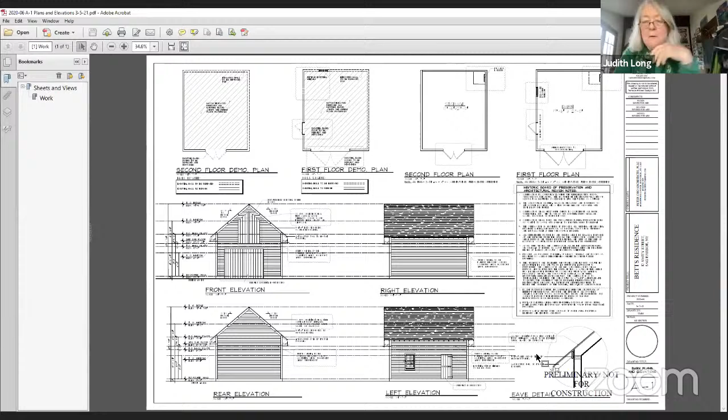No, you're not wrong at all, Judith. And when we were there, as the applicant has said, we were able to see traces of old red paint on the side of the building that retains a portion of its original siding. And I think I understood him to say at the beginning of this that it was going to be painted red.

I'm also a little mystified. Well, I'll clarify - our intent was to paint it red. After discussion with the neighbor, they objected to that. So I'm trying to thread the needle here and navigate this process. And so while we like the idea of painting the barn, we're trying to move this project ahead.

And so I don't disagree with you. I mean, I have a property in Connecticut. I have a red barn, I have a yellow barn, and I have an unpainted barn on the property. And I understand that historically barns are red, but I'm also trying to navigate this process.

Okay, we're not generalizing, we're not saying barns were red or barns were not. What we're saying is that there's evidence there that we have seen for the fact that this particular barn, if you will, carriage house, whatever you want to call it, was painted red, and that's a very early color. It doesn't look like it's a coat of paint on top of an earlier coat.

Right. If your neighbor is here, it would probably be good to hear whatever the objection is. This is the forum for the discussion. Steve, do you have comments?

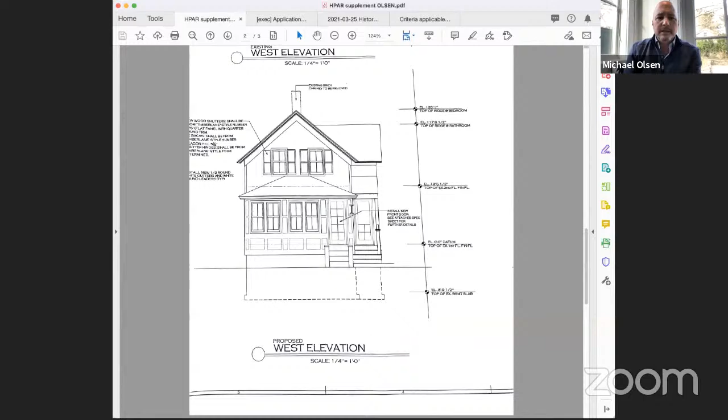And the proposal submitted in December was to replace it with a door like that. There was some discussion about whether it'd be more appropriate to do a 10-light that matched, so I supplemented the application. This was the original plans approved by the building inspector proposing installing a new front door, and I proposed to do that with a 10-light that matches, which will repair the door currently there.

Bethany, comments? I think that's great. Steve? Perfect. It's fine. Bob? I think that's fine. Judith? Yes, it's fine. Val? Yep, we're good.

Okay, great, moving right along. 128 Jermain, please. Good evening, members of the board. Brian DeSesa, 2462 Main Street, Suite 7, Bridgehampton, New York, attorney for the applicant.

If I could screen share please, Carrie. Mr. Chairman, you can go ahead. Thank you, Brian. This is the first time I'm appearing before you on this project. We have made some revisions since the board last saw this, and clarifications, so I'd like to walk the board through that. First, everyone can see this screen, the survey?

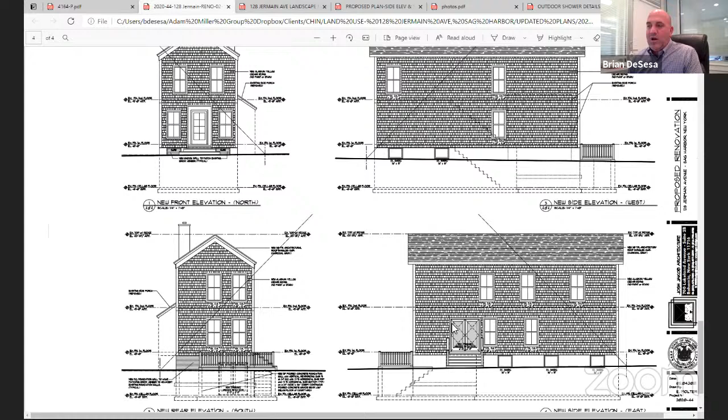Good. I'd like to take you to the elevations so we can be clearer on these. The proposal, and we can zoom in, is to re-side the existing house, change the roofing. We've spec'd those on the materials submitted, and to introduce a French door on the eastern elevation with a set of stairs. I could zoom in on that.

Okay, you're so gonna get - there you go. Yep, so this is the proposed new door, a hinged patio door with a set of stairs to leave that internal area and stairs down to existing grade. This also shows where grade would be and where these stairs would go down to enter that basement area.

If I could just point out a couple things that I need clarified. Yes. EXDH - existing double hung, I'm assuming? Yes, that is correct. And then at the grade level where the existing awning windows are, you're gonna clad that with brick? That is correct. Does that say that somewhere?

I can have that added. I thought that was on there. Just to make a note, Mr. Chairman, you're supposed to match the other two sides. I don't think that's possible because the new foundation that's been poured comes out to a full dimension of the basement.

Any application of material other than paint would bring it forward of the siding. Now, Brian, in a previous meeting there was some sort of approval to fix this basement that had been removed because of a dangerous situation. That's correct, and the detail did have the concrete and then incorporating that brick skirt. And it's going to be faced in brick. That's my understanding, that has not changed.

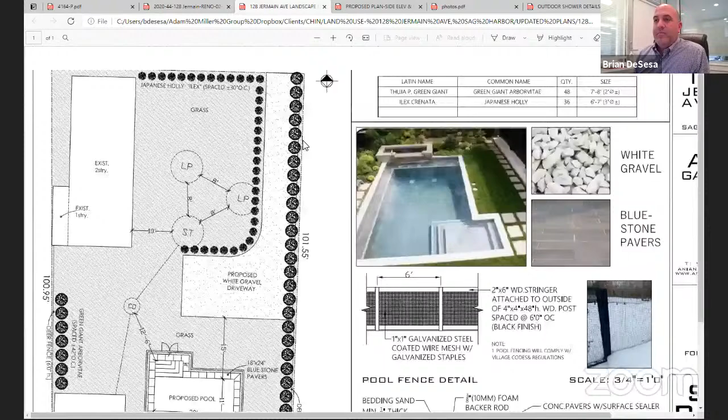We then also had an addition to the landscaping. We cleaned up the landscape plan. There wasn't one there previously, so we gave a planting chart, a materials chart, a fence detail, and indicated spacing on center. As the board may recall, the pool that is currently proposed was approved under a 2013 ARB decision in the same location and orientation, but wasn't provided with as much detail, so we provided the coping details and additional materials this board now requests, which was different from 2013.

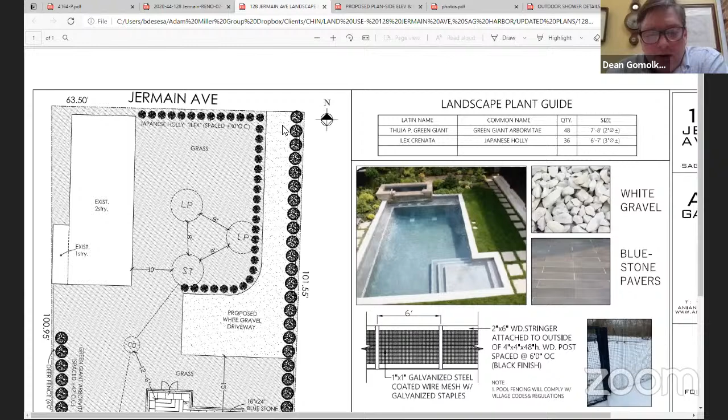So to call out the details, can you explain how you complete the circuit with the pool fencing, and the exact vertical dimension of this final fence? I can have that called out on the survey. It's not on there, I can have that called out. Because if you look from Jermain, I don't see how this pool fence closes, and we would have full view of a 6-foot 1x1 fence from the street. Okay, we can do that. Okay, please continue.

And then going back to the roofing, it's now called out as charcoal gray, which is what the applicant is proposing. And the siding is to be Alaskan yellow cedar, to weather naturally. Those were the open points from reviewing the last meetings based on my review.

Judith, do you have comments on this application? I would like to know about adding the doors on the side. Is it all right to simply punch a big hole in the side of a historic house and add big doors? Also, these doors look to be oddly very close to a window. Zach, can you opine on these doors and also the siding? Yeah, well, there are two points there.

I guess the siding was brought up first, and my observation is that the original shiplap siding exists beneath the present asbestos shingle applied on top. So I wouldn't advise that wood shingle be used. This was built as a commercial store, not a house. I think the use of wood shingle sort of charms it up, tries to transform it into something it's not. So just as we had a siding discussion a few minutes ago with another building across town, we have a comparable situation here, except all the original siding appears to survive beneath the newer layer, and it may have been damaged in the process, but we're not going to know that until it's taken off. That's my recommendation on the siding.

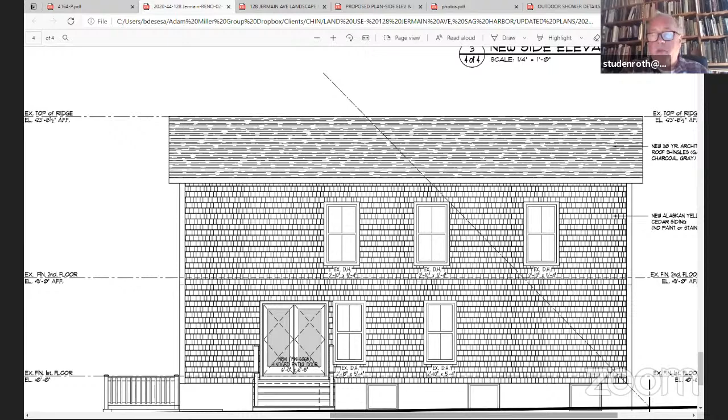I think Judith's point is quite right. You do allow the introduction of a door or a different window from time to time to accommodate a new usage of the space. But the way that pair of doors is placed is uncomfortably close to the window, which looks like it's actually been nudged about 8 inches to the side to make it work. A single door, for example, would work just as well to enable the applicant to get in and out without making such a bold statement. Perhaps a door divided into 4 lights, as opposed to a pair of single light doors, would aesthetically blend better on that wall. It's quite visible from the street, not like the back wall where you could take more liberties. So I think a single door leading to a flight of steps down wouldn't be a major change to that wall.

Do you have comments? Al Florio: yeah, I was going to say if they could put lights in the door, I think it would make it consistent to the house, maybe harmonize a little bit better. That's a good point.

So what if I propose this to the board: if the board would grant permission to remove the existing siding so we could see the condition of the underneath siding, because the proposition is that it's in good condition. Let's remove it to see, and follow up in 2 weeks. I wasn't making an observation about condition because we can't see the condition. My comment was to remove the existing so we could see the condition, because we don't know if it's good or bad until we remove it. But the decision about the type of siding is not contingent upon the condition of what is there. It's about observation — whether the condition of the original siding beneath the later layers is deemed such that it cannot be preserved, that type is still the presenting fact, not 'oh well, then we can choose whatever siding we want.' That's the point of the forensic investigation, is to determine what is appropriate.

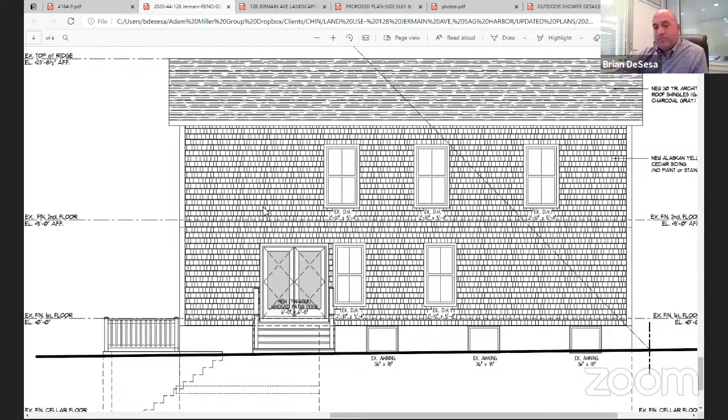So, Bethany, do you have any other comments? No, just that it was voted on and approved, that's all. Yeah, but they're here now to present. I understand, whatever the deal is — Miss Bethany, that's not fair. Excuse me, I'm just saying, I just want to put it on the record that last meeting she did come to us with the extending of the ARB approval for the siding and the pool. It was yellow, correct, so I just want you guys to be aware of that. That's what I remember.

But I do know that we're here for new requests, so that's why I bring that up in this format.

Could I bring up the missing chimney? I don't see a chimney in this drawing. I know that the existing chimney, the original one, was demolished. I don't know that, because there's still a patch in the roof showing where it was. It was on the other slope of the roof, slightly off the ridge. That's now been demolished; it's on the other side. Correct, it was there. Oh, there it is.

That's representing where the applicant would like to put it. It should show up on both walls because it rises considerably above the ridge. It doesn't show up on the side elevation, and that's not where the original one was. Just pointing out that that's something that was removed without this board's approval.

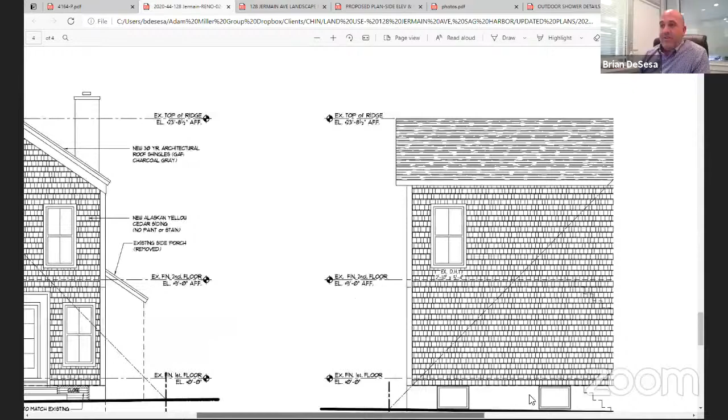Brian, can you have that chimney detailed so we know what materials are used? Yep, I can have it added to the sides.

Zach, from a historical perspective, the one that replaces it should be in the same spot. Does it matter where it was? The way it's presented, it's kind of transforming this old store into a house. It's bringing the chimney over to the outside side wall so a chimney piece can presumably be stuck against the side wall inside. That's not your issue if you're not living in the house, but it transforms the appearance of the building in a way that was not discussed.

And that was just one of the architectural features. It's a very simple house, but there are a couple of distinctive features. One being that very prominent centered front door, which tells you it's not a house, it's a store. And that chimney, which was closer to the ridge and way in the back, because that's where people presumably lived upstairs above the store. Now we've lost the chimney. I'm just pointing that out as something that's been overlooked in the discussion, and it's one more element that's been removed without discussion.

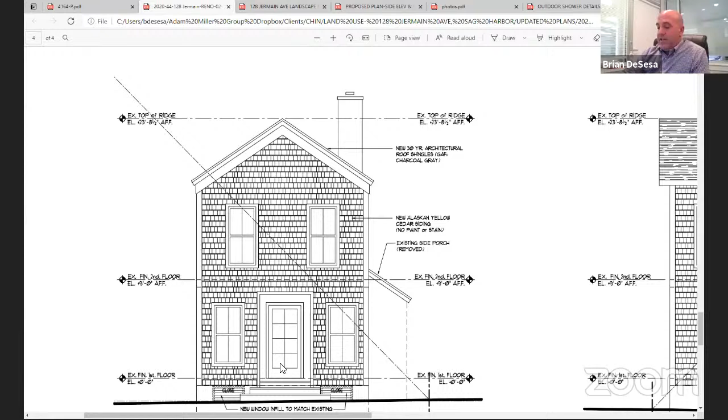Okay, Brian, that's important, right? Yep, we'll get that detail added. Not a problem. Okay, Steve Williams, comments?

No, I think a lot has been said. I just, in these elevations, things don't seem to be proportional. If you look at the two windows over the center door entrance, one kind of overhangs the molding, one doesn't—the one on the left doesn't seem to. Can we get some dimensions, representations of some plans?

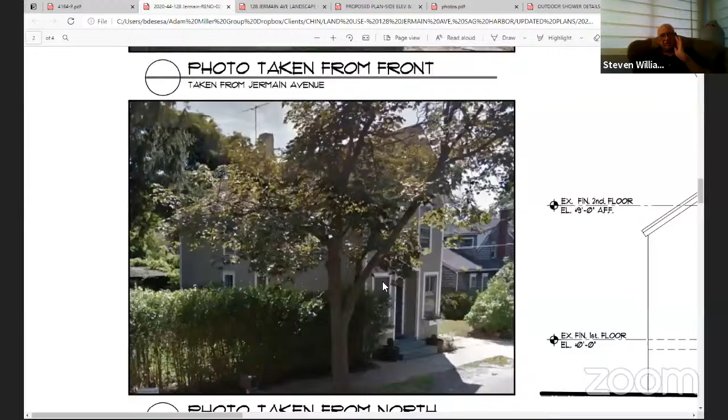Mr. Williams, if you look, I have some photos here that actually show that's the existing condition on the property. Just to let you know, it's not centered on the actual existing house. So do you have photos of the side? Because I noticed it also on the side elevations, or the drawings of the elevations. All existing windows are remaining. That's correct, they have them here. I'll get a picture that doesn't have the trees on it for you for the next one, but yes.

And can you superimpose the requested side entry door? I can ask for that. Okay, thank you. Bob Adams? I think everything's really been covered.

I'll make that motion to table 128 Jermain Avenue. Is there a second? Second. That's Steve Williams. All in favor? Aye. Opposed? Great, thank you very much, Brian. And that date is the 8th, April 8th. Thank you.

New business, and that is 8 Dartmouth Road, please. Good evening, members of the board. Brian DeSesa, attorney for the applicant of 8 Dartmouth Road, 2462 Main Street, Suite 7, Bridgehampton, New York. If I may share, Mr. Chairman. Go ahead.

So this is an application for property located at 8 Dartmouth. This project, as some of you may have read, there was an issue with the builder the applicant had hired, who subsequently fraudulently obtained building and ARB approvals and is now being prosecuted by the district attorney's office. The homeowner and applicant was unaware that both approvals presented to him were not in fact issued by the village. So we're in a situation where there is a partial as-built. Work was stopped, and we're now restarting the process, coming to the architectural review board first.

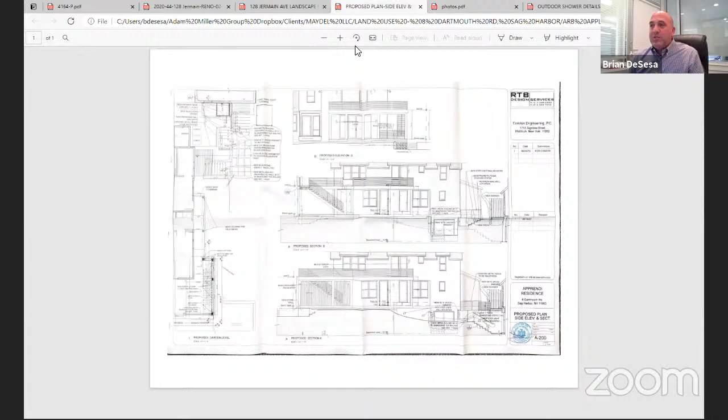What the applicant is proposing is, on the northern elevation I just showed you, introducing a door on their second floor in the hallway. There are bedrooms to this side of the house, and a master on the other side.

Brian, I remember that this site is heavily screened. It is, so I have some photos to present. This was the area that was added under the guise of a permit, before a stop work order was issued. This is the view looking north toward the neighbor of that area.

This is the area looking the reverse way. These are the renderings of what was being proposed: a catwalk across, with a walkway to connect to the main deck on the eastern side of the property, with a staircase and railing down.

What the applicant was proposing: there's an existing deck here, as you can see in this presentation, and they're proposing to make this addition across there. In addition, also done at the same time we're looking for permission for, an outdoor shower was constructed.

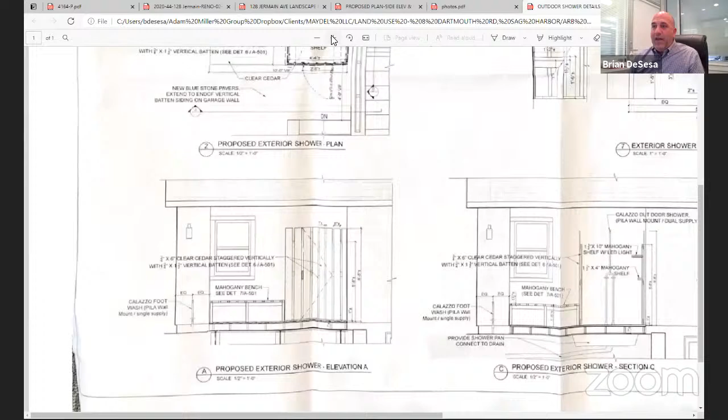We're looking for a restart on both of these matters, where the applicant was presented with the idea that approvals had been obtained, which hadn't been. This is actually finished. The decking catwalk area was under construction when that was ascertained.

Brian, will these structures require variances? The catwalk will require a variance, but we wanted to get this board's input first before we proceed in that way from an aesthetic standpoint.

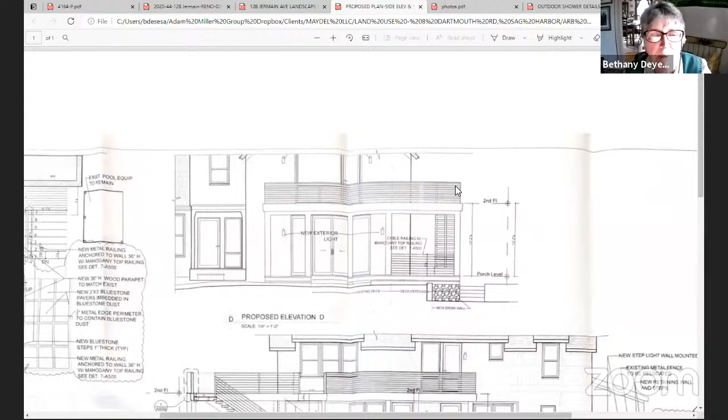So how far does the deck go back? Let's see the picture, Brian. How far... does the new deck, are they going to build out from the bottom? No, it's just on the second floor. And the area from the corner of the existing house to where the new door is...

It's 3 feet 6 inches wide. It gets wider here, but the area adjacent to the house would be the area that a variance would need to be obtained for. The rest of it would conform to what's existing.

I would note, this is the first floor of that area, where you see the existing decking, which would remain, and the applicant is proposing to add this above it. So you have that existing.

So does it wrap around all the way? It wraps from here to this deck area, which is existing and was permitted. And this deck area then looks toward the pool and the 3 roads that surround the house. So this is that deck.

Steve Williams, comments?

Steve, can the public offer comment now, or should I tell you when? Tell me when. I just want to run through my board first, please.

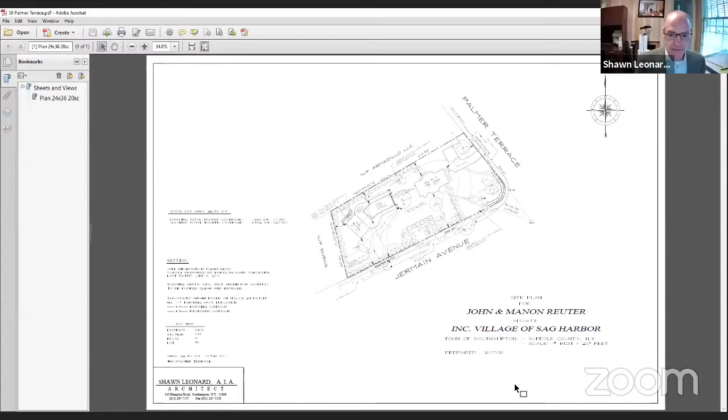I had been before this board a couple of years ago for this property, for which there was going to be an addition put onto the house. We did have a pool, and none of that is going forward. As you can see from the new proposed site plan, the existing house is staying as is, and the existing curb cut off of Jermain would remain.

What we're proposing is a new pool design placed right off of the accessory building on the property, with a bluestone patio going around it. Because of the grade change from the house to the accessory building, we have a proposed retaining wall, which would be 2 feet high on the house side of the pool.

We have it all screened off. What we originally had was arborvitaes running around the property, and the fence would be a pool-compliant metal fence inside the tree hedge, 4 feet high and black in color.

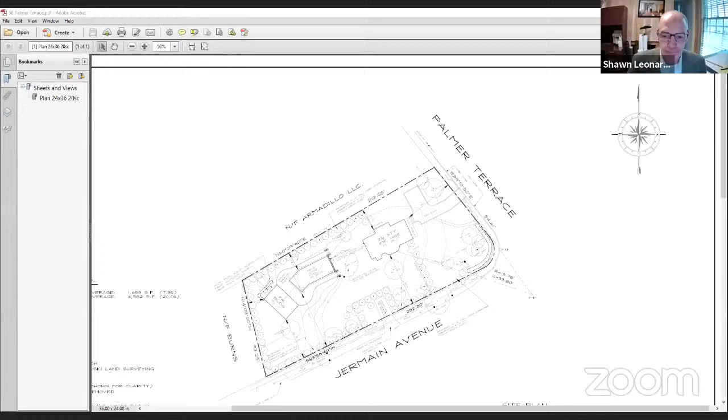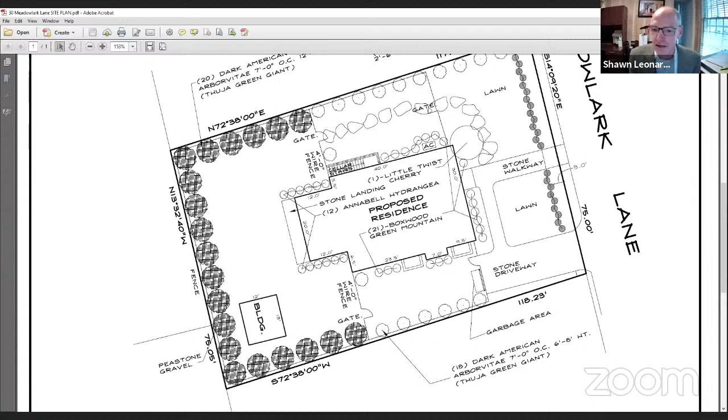We did present the drawing of the gate and fence we're proposing on either side of the house, which is in your packet. It'll just be a white picket fence, 4 feet high on both sides, and then there's the garbage enclosure.

Any questions? Back to that site plan, Carrie? And then the driveway, it's just a picky thing, but you're supposed to maintain that 5-foot setback from the property line. 5 feet there. You're maintaining the 5 feet? Yes, we'll make sure I maintain the 5 feet. Great, I'll note that.

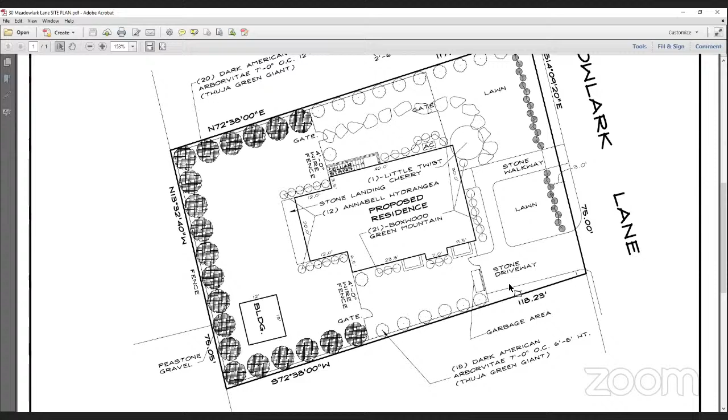Okay, Bethany, comments? I'm fine with this plan. Judith? Totally fine. Steve? I'm fine with it. Val? Yep, we're good. Bob? I'm good with it. Do I have a motion to approve 30 Meadowlark? I'll make that motion. Who's the second on that? Steve? Yeah, I'm second. That's Judith and Steve. All in favor? Aye. Opposed? Thank you very much.

Sag Harbor Yacht Club, please. Anybody here for Sag Harbor Yacht Club? Okay, possibly we'll second call that. Patrick Malloy, 1A Bay Street. Patrick Malloy, I believe it's 84 High Street. Dean, I believe it's a sign.

Can we move on the Malloy sign? So we'll hold off on the canopy, which is the Sag Harbor Yacht Club. Carrie, are they just replacing the existing awning? No, I believe they're adding and making the canopy, like the picnic area, bigger, but I'm not 100% sure. Dennis Downs is representing that. Yeah, it was hard reading the plan. Okay, so we need representation on that one. So to Mrs. Dearman's point, can we take a look at the Malloy property?

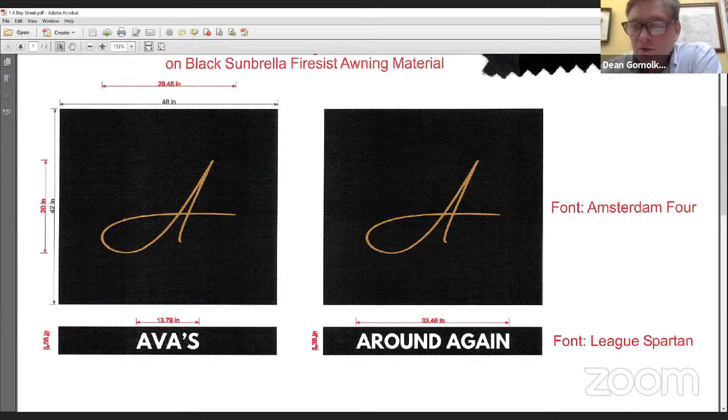Okay, Val, comments? No. Judith? I think they look quite nice. Steve? I think it's fine. Bethany? I actually would like to make the motion, I'll move for the Malloy 1A Bay Street signs. Is there a second? I'll second. Bethany and Val, all in favor? Aye. Opposed? Thank you both so much.

84 High Street. That's me, Carrie. Okay, who's me?

David Burridge. Look who's here. Oh, hey David, how are you all doing? You're still all having fun. Nice to see you. I'm still in the same place. Okay, so are you going to show it, Carrie, or do you want me to share the screen? I can do it if you'd like. Yeah, I can blow it up if you want. Your choice, I mean, ask questions.

All right, go ahead. Survey.

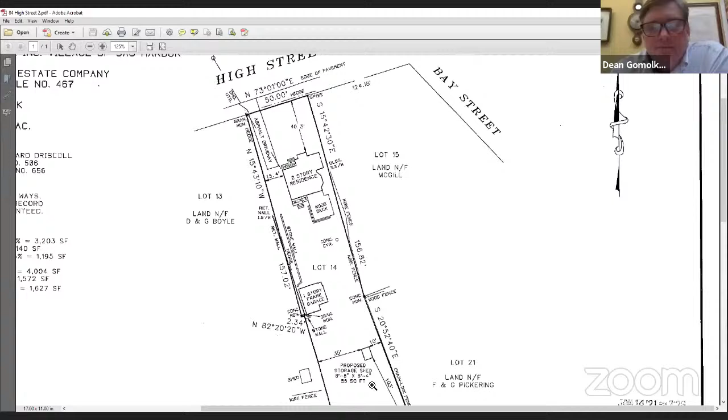Just show us your details. Yeah, on the second sheet, Carrie. Do you want me to show it? I got it. Oh yeah, got it. Oh yeah, I remember.

So David, walk us through this design. Okay, as I said, in the wooded half lot that goes through to Prospect Street, there's just a little 9-foot by 6-foot shed in the woods, and we've got a fence between the shed and the Pickerings' property next to us, so they don't have to look at the shed. We've also got another fence on the other side — if you look at drawing number 9, it's between our existing outbuilding and the neighbor's pool we want to screen.

Great presentation, David, thank you very much. You don't know how much I mean that. Yeah, Judith, comments? I think it looks lovely.

I'm curious, is it all right to put a shed on a separate lot? No, it is all one lot — when they divided Sag Harbor it was all these different lots, but it's been the same lot for the last 70 years. Oh, so it's actually just one giant piece of property that goes all the way through. So anyway, I think it looks great.

Thank you, nice to see you, David. Yeah, good to see you all. Keep up the good work.

I'd like to make a motion, Mr. Chairman, that we accept the proposal as presented at 84 High. Okay, anybody second? I second that. Second. All in favor? Aye. Opposed? Great, thank you.

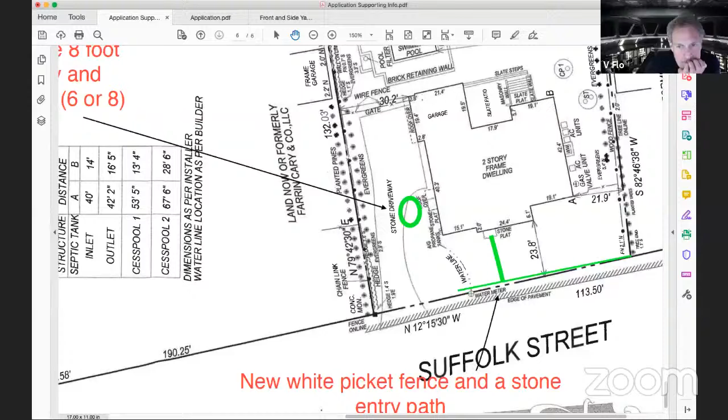So you said you don't require me at the next meeting, just these details? Yes, please. Okay, understood. I make a motion to close and table 43 Suffolk Street. Do I have a second? Second. All in favor? Aye. Opposed? So that was me and Val.

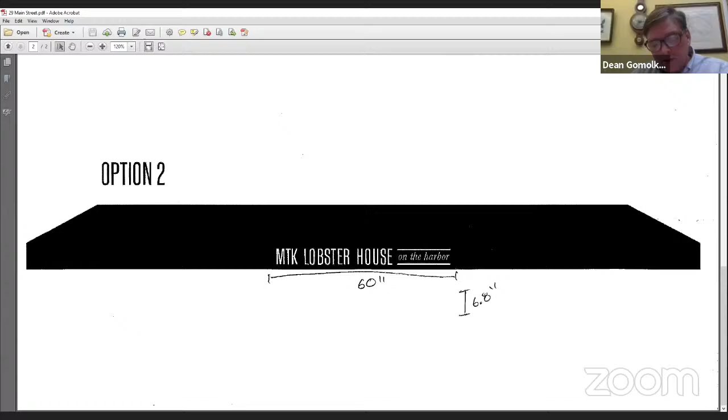Hi there, everyone. It's David Filer from Whalen Filer, PLLC, 532 Montauk Highway, Amagansett, and I represent the owners of 29 Prospect Avenue, Dan Weiss and Amy Burkauer. How are you all tonight? Great, you? Good, thank you. Nice to see you. So we're before the board applying for a certificate of appropriateness for installation of a generator behind 29 Prospect Avenue.

I'm glad to share my screen, or Carrie, if you want to pull it up. I just thought we'd look at a couple of photos and the survey to show you all where the proposed generator would go. You can share your screen. Okay, thanks, Carrie. Let's see if this works.

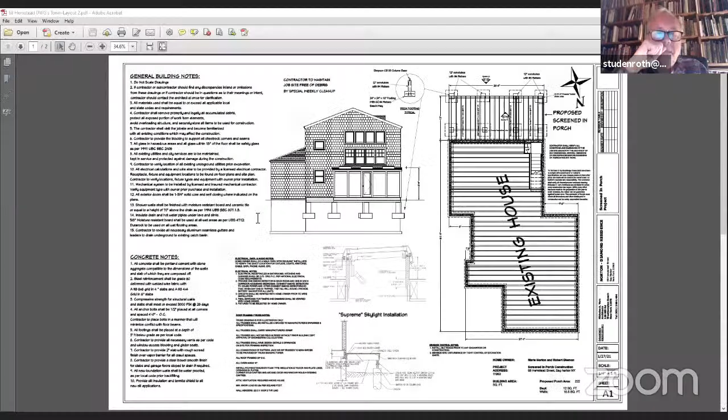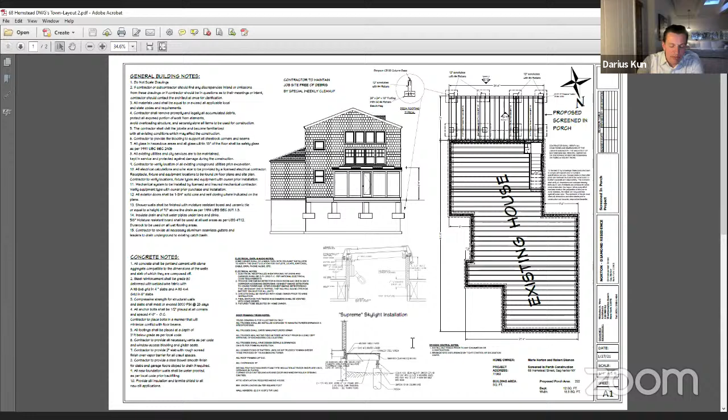And the survey, if you could find it please. Darius, this is all that we were sent, is this and this. Okay, I have a survey with me, I'll try to start it up on my screen, maybe later, but you can email it to me and I can pull it up that way, but this is all we were sent in the PDF. Okay, so can you leave the 3D photo here? Actually, do you have a JPEG that I sent you of the property? I emailed it to you. It's in your email, I believe this is what we got, but I will look.

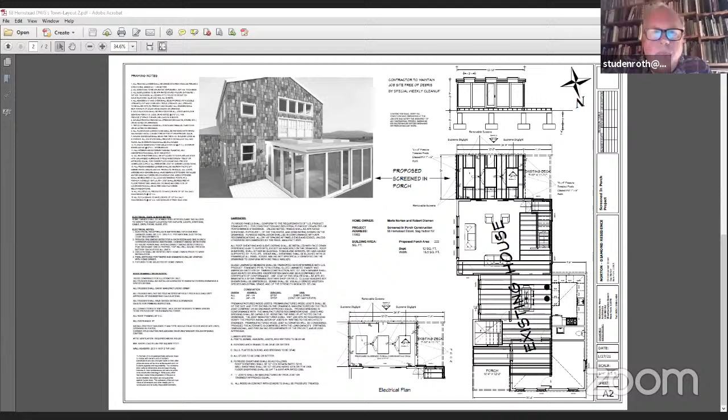Do you have any comments on this property? I'm sorry? Zach? Oh, I'm sorry. Well, I'm a little perplexed because this is listed in the nomination as a contributing building from the 1850s, and from the angle we're looking at it, I'm not getting that, so I'm not... okay, sure.

So can everybody see the survey? We can, yes. Okay, so if you look to the back of the house, you see Hempstead Street up front. And if you look at the back, it shows a proposed porch over existing deck. So there is an existing deck, which is 12 by 26. And we would like to build a screened-in porch on top of the existing deck, which is much smaller, only 12 foot by 18 and a half.

And the purpose why the homeowners want it is to protect them from summer heat and mosquitoes, because as you know, there is a Sag Harbor Bay right across Hempstead Street, and in summer, if the wind is a certain direction, mosquitoes just fly in over, and it's impossible to be there in the back.

You want to take a look at this property? Sure, Zach? Yeah, it'd be interesting because the question might arise how much of this is going to be visible from Hempstead Street, since it's a contributing building. Actually, from Hempstead Street, you probably will not be able to see it at all. Well, that's what a site visit would determine. Oh yes, sure, of course.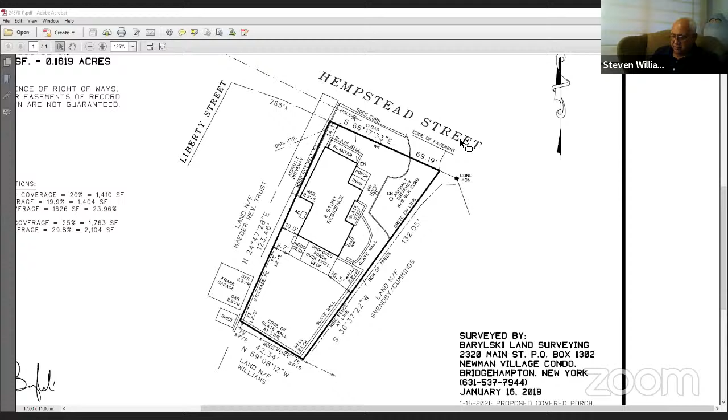227 Main Street is on the phone, I believe. Oh geez, and he couldn't hear, but he just asked me for the Zoom link again. So maybe we'll just go on to the next one, and if he shows... we have to go on to the next one. Okay, 69 Redwood, please.

69 Redwood. Oh, okay, we'll second that. 38 Meadowlark, please.

38 Meadowlark. Yes, hi, Mr. Chairman, this is Jim Grimes and my assistant Niamh Hegarty, and we have a proposal for you guys.

Unfortunately, we did a retaining wall on this property without understanding it required a certificate of appropriateness. It's something I don't like to do, it's an after-the-fact situation, and that's what we're before you for tonight.

We have photos and drawings and can walk you through it. If Carrie, if you can put it... those, I'm getting it. Thank you. Oh, thank you. So here's the... okay.

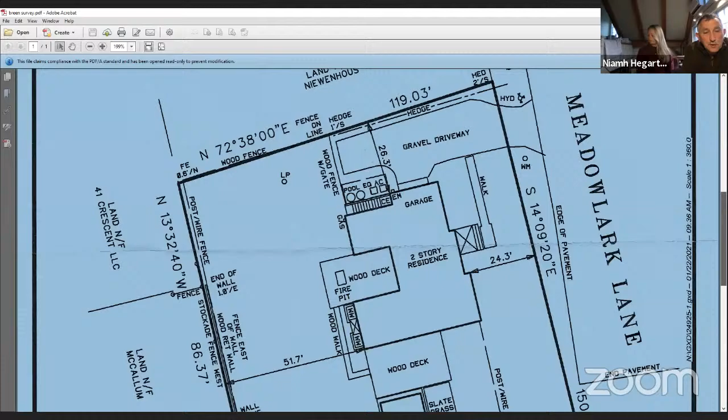Mr. Chairman, this is the survey, and this is as-built. This survey was updated in January. It shows that dimensionally the timber crib walls are well within the property line. The maximum overall height on this wall is 3 feet at its highest, which is just about where you see the stockade fence, above the 87.93, where it reaches its maximum height. As you can see in the survey, it abuts an existing stockade fence, which is the neighbor's.

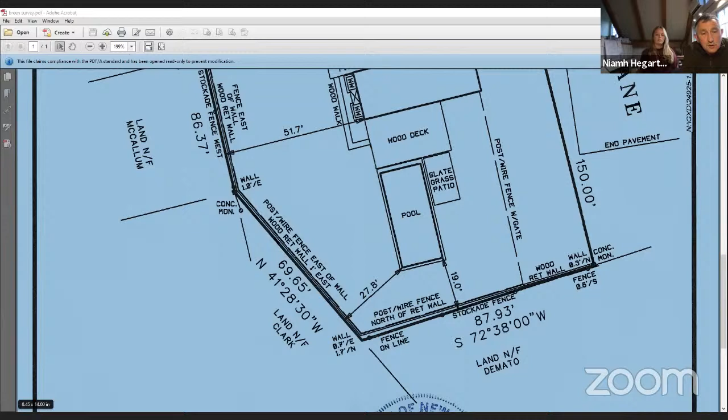So it's not visible from that neighbor's side. Where the stockade fence continues around, there's another neighbor with another stockade fence, and there's about a 20 or 30 foot section where it's really only about 2 to 2.5 feet in height that is visible from what's described as the Clark property, which doesn't show in this survey, but that's almost like a dog leg or a right of way—just a very narrow strip of land that abuts my client. Take a moment.

Elizabeth, what's the code on the wall and the property line, please? The walls have to be 3 feet back, I believe. 3 feet off the property line. Right, I believe so, that's my understanding, for retaining walls. Yep. So okay, Mr. Grimes, let's just continue with the rest of this, and then we're gonna have to figure out how to, where we go from here. All right.

Well, the proposal was to basically install Western arborvitae, identical to what's found on the property in other areas. You can see the unhighlighted existing arborvitaes on the property. It was just basically screening the backyard, adding a couple of crepe myrtles along that back line.

And what there is, Mr. Chairman, if you look up to the north, there is an existing Norway maple, which is really kind of a health and safety hazard. It's a typical Norway maple in the village there, probably never actually planted. It's multi-leadered, it's got an included bark situation. There are already some stress cracks appearing there that we were proposing removing and replacing with a 6-inch Eastern red maple.

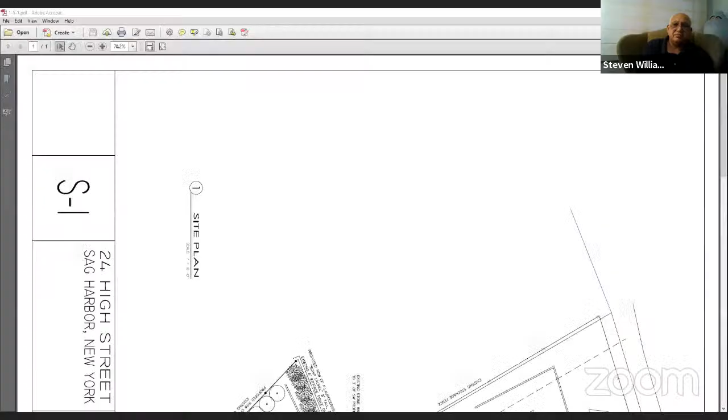You can see, Carrie, if you could bring up the site plan S1. Okay, so you can see it's a sort of L-shaped property. The main house is there up pretty close to High Street in the big black box. We're proposing a small pergola off of that house, we'll get to the detail on that in a moment. But then in the corner of the L is where we're proposing the swimming pool and pool house, and it's basically at that angle to fit in with the various setbacks for those structures.

The pool house itself, on P1, is basically just a scaled-down version of the main house, with trim details and materials to match the main house. The swimming pool is 29 by 14 with an 8 by 8 spa, bluestone coping and patio. So there's the pool house, and the pool and the details for that.

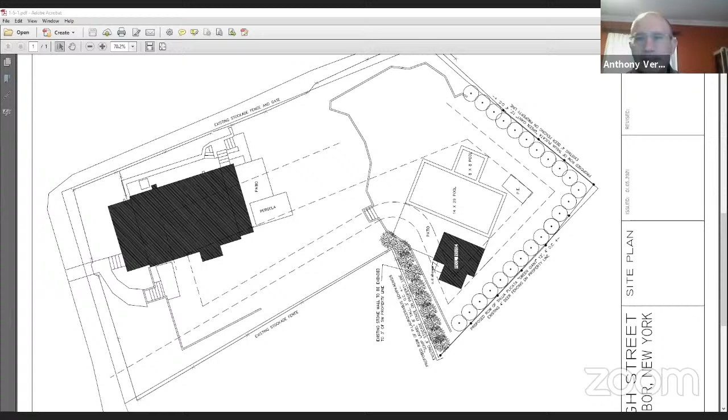Can we see the pergola? And Anthony, are there pictures of the existing house? Yes, I do have, there should be some photos in the file, one showing the rear elevation, a view of the whole rear yard, and a close-up of the rear elevation of the house. Do you see that? Can we see the next one, if possible?

Great, and then if we can go back to the elevation of the pool house, so I can run through it for the board. What page is that on, Anthony? That would be P1. Anthony, what do you think the stone columns are?

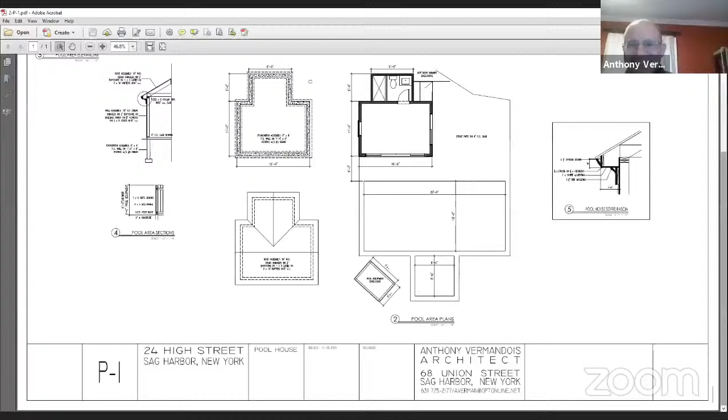It's growing late, I can tell you. Go ahead. That's a burying ground behind there with a crypt in the ground. Right, next to it. Those are the stone piers spaced at 10-foot intervals that supported a wooden picket fence that surrounded that entire site. That related to the Methodist church when it was up the street there, before it was moved to its present location.

It's important that those stone piers not be disturbed, they're really on the adjoining property, I guess. Yeah, I don't think they're on our property. They're behind that wire fence. Those are important relics. The house, I'm interested, of course, but the house was built by my great-grandfather. My mother was born in that house.

Was the parsonage connected to the church? No, because the parsonage was there too, up the street. Okay, great history. Thank you, everyone.

Val, how do you feel about this pool house? I think it's motion worthy. I agree. How about the pergola, did we see that? No, we didn't see the pergola, just the stone footprint on the plan.

Yeah, it's on A1 there. The pergola is just a little structure. If you look at the rear elevation of the house, it's kind of an asymmetrical mismatch, and the pergola will just be freestanding coming off the corner. Carrie, if you could find that elevation of the pergola, that'd be great.

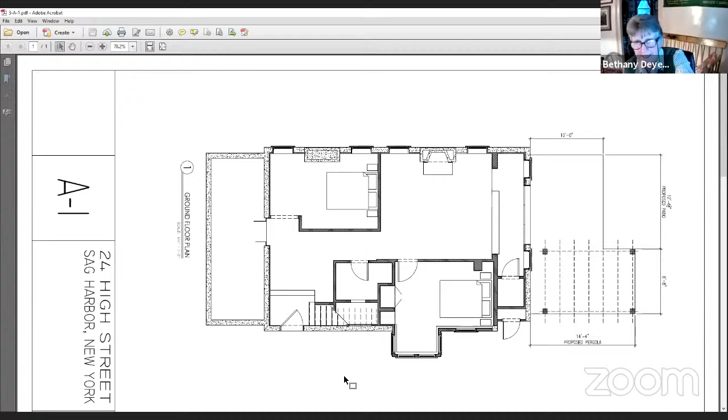Steve, how do you feel about this project? What picture is that, A1? So is this it? It's on A1, but it only shows part of the page, so scroll down. There it is, okay, thank you.

Well, now it's upside down. Fixing it. That's all right, there we go. Okay, critics, I think it's fine.

Bethany, do you have to recuse yourself since you built it? No, not at this stage of the game. I think it's fine. Bob Adams? I think it's fine. Judith? I think it's fine.

I make a motion to approve 24 High Street. Is there a second? I'll second it. All in favor? Aye. Aye. Opposed? That's Dean and Bethany. Thank you. Madison Street, please.

Hello? Yes, please state your name for the record. Hey, this is Steve Kosak, 227 Main Street. No, we're at 31 Madison. You want to come back? We'll come back. 31 Madison, please. Hi, Chris Coffey, 31 Madison, on behalf of 595 Realty.

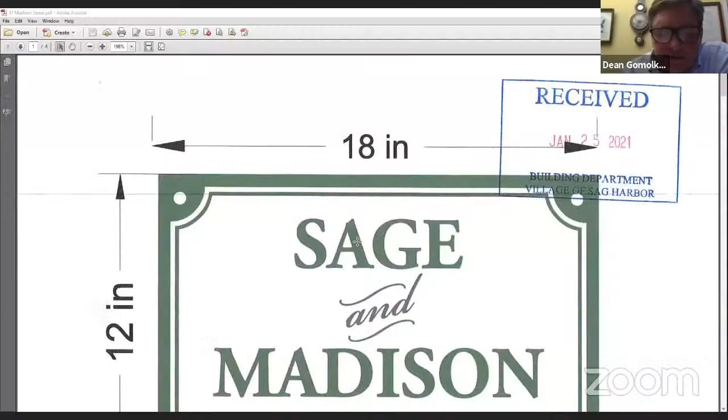Okay, tell us about your project. I am proposing a new sign outside of the store, a small wooden sign that is 18 inches by 12 inches high by 18 inches long. Can we see this sign? Yes, Carrie, do you have the image? Yep, I'm pulling it up right now. Thank you.

Where is this sign being applied? Right outside, there's antique doors that open up on the existing structure, right over the door. What is the distance between the edge of the sign and the building? It's about an inch or 2 inches. Okay, great, because the code requires about a foot.

It is a foot. Okay, I make a motion to approve 31 Madison, is there a second? I second. Bob, you can't second. I got it, I'll second. All in favor? Aye. Aye. Opposed? Thank you.

Rose Street, please. 12 Rose, they're just probably unmuting. Don't you love it? Yeah.

Deb, are you on? Yes, I am. Okay, hi, tell us about your project. I am part of the awning part of the project at 12 Rose Street. We would like to move the awning. The business has moved from Water Street to 12 Rose Street, and we would like to move the awning over the door. It has already been taken down from Water Street, and we would like to install it. That's the part I'm involved with.

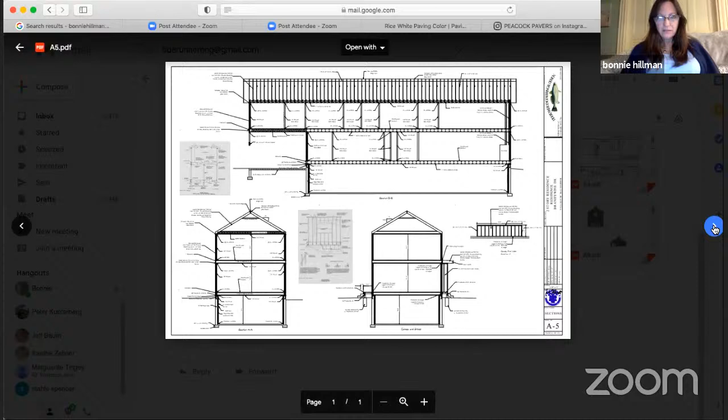Okay, thank you, Carrie. So this is the house, I'll just scroll through here so you can see the front. So this is it, basically it's just a very simple design.

It's going to have an asphalt black roof with architectural tile. The cladding will be white shiplap, 4-inch board with a 5/8 inch gap. The windows are 6 by 6, black windows, and they will sort of surround the door as you see here. It's a recessed entrance that's 7 foot wide and 6 foot deep, with a very narrow awning over the top because I need to maintain and stay within the building envelope.

And the back of the house has windows that spread across, allowing light into all the bedrooms. These are all sliding doors, there's 2 picture windows here and another slider here. And then this is a door that leads to a bathroom that will give access from the pool to a bathroom in the house for kids needing to shower and that sort of thing.

And from the side, you can see this side actually faces Horizon because the block is on a corner, it's Brandywine and Horizon. So from Horizon, you'll see the garage and the window over the top. This, no one will really see, because this faces the reserve that you can't really see from anywhere. And let's see.

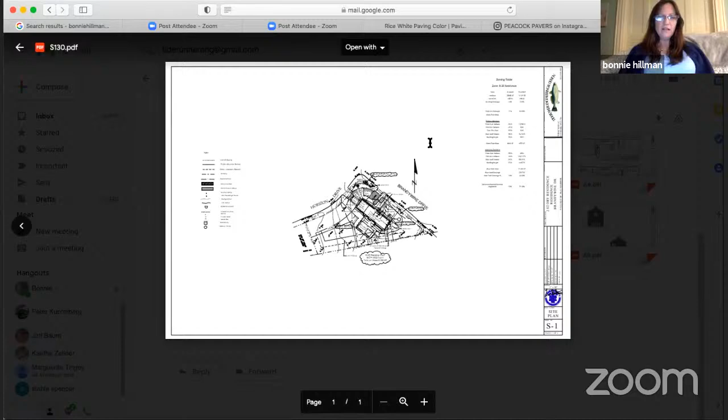Okay, this was a lot larger at one time. They asked me to make it smaller. When we sent it in, it was actually 20 scale, and they asked me to make it 30, so you could barely see it. But this is the site plan.

Here's Brandywine, here's Horizon, along Horizon, and I can show you the landscape plan. I'm putting green giants there, but I was going to ask permission to possibly switch to Leyland cypress, so all along here will be Leyland cypress to block and act as a screen so that you can't see the backyard from Horizon. I'll show you the landscape plan that shows that will be completely protected. The driveway, you can enter here into the garage or from the front, so it'll just sort of swing around.

And that's going to be pebbles or those little stones. And the yard, can we see the landscape plan? Because this is really small. Sorry about that, I spoke with Bonnie regarding that. She did say she would get a larger size, but it is one of the requests that she was given, being on that small. The landscape plan, bear with me one moment because that's not in this folder.

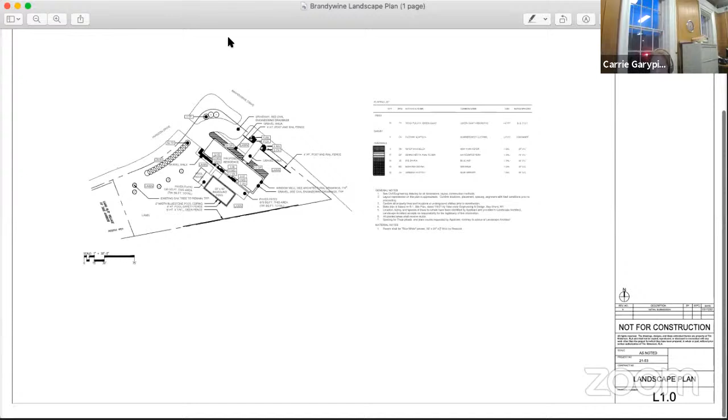Oh, here it is. Can you see this? You just got to click on it, Bonnie. Oh, okay. Okay, here we go. Can you see that? Yeah, you could probably make it bigger, you could zoom into it. Okay. Is that? Yeah, thank you so much. Okay, thanks, Goldie. Okay, so here we go.

So here's the screen of either green giants or Leyland cypress that's going to protect the visual, so you won't see the backyard. It's just going to be mostly grass, and then the pool, 20 by 40 pool. This will be peacock pavers in rice white, so I have a picture of them. They're just a very beautiful, natural looking paver that's also affordable because I'm on a budget.

And then here's the pool house that will mimic the style of the house, so it's a very simple, same roof. It'll have a solid back. The front will be open toward the pool, and the sides will have more of a slatted look to let a little bit of light through there.

This is the door that leads into the house, and here's where the sliding doors are. That'll have a couple of steps down to the pavers, front entrance, and this is all stones, and all the setbacks have been met. I was dealing with Tom on this, so I got his approval on everything in terms of the layout and everything meeting the guidelines as far as the setbacks and the building envelope.

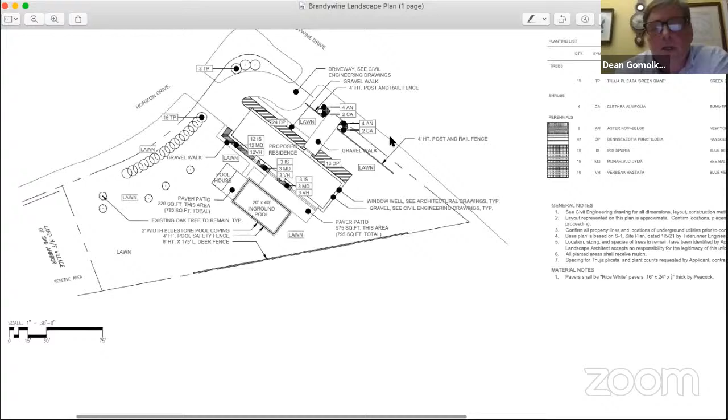Question item, and I'll just make a couple quick comments. I think regarding what is required for us to really sink our teeth into these drawings, and then we'll go to the board as far as the style of the house. We need an eave detail so we know what that soffit looks like and what all those elements that compose of that are, how far it comes off the house, if it does or not. The entrance details as far as the columns are concerned, and the width of the members comprising the overhang from the front door and what is really happening in that. So we really need the trim around the windows, what the sill is, how the aesthetics and the treatments work. It just seems like there are a lot of elements there that we can't really make a decision on because we don't know exactly what's going.

The different reveals of the elements around the doors, the windows, the railings for the front door, and how all that's working. And then as far as the site is concerned, a true grading plan would be great. There's a lot of grade on this property. And then existing trees and the size of the trees.

I think the grading, it's a flat lot. And the grade is on the site plan, I can send you a larger one that shows all the grading. I can get you a drawing done. The engineer or architect can do a drawing that will show more of the window treatment, the trim. It's going to be very simple, and that'll be easy to show in a drawing.

That's an eave detail, and how the whole front door and all these intricate details work, since we're an aesthetic board, so we're here to make calls on the aesthetics. It's really important that we have access to that information, as well as a photo of what the front door will look like. Would you like to see a picture of the front door? Because I do have a photo that shows what the front entrance will look like. I'd love to see that detailed out in some architectural drawings.

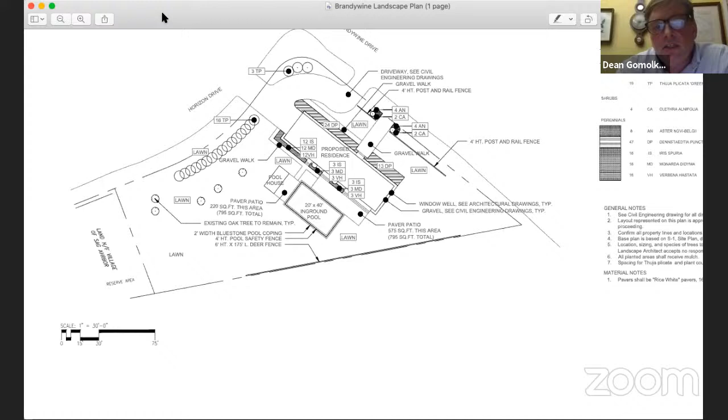But before we go further, the site and the existing trees on this site, especially the ones you are planning to remove, and the size of these trees and where they are located is really important. The whole lot is a treed lot. It's an empty lot and it is treed. It actually borders the 25-acre reserve.

And I was planning to clear a lot of it. Before Tom left, he told me it was fine, that there were no clearing restrictions, but I've chosen some of the larger oaks just because I like oak trees. These are the ones I was keeping to buffer a bit more from the street. But mostly, because there's so many trees surrounding the lot, I wanted to have a lot of grass there, so I was planning, if it's okay with you, to clear it and put grass.

We would like to know which trees you're planning on removing. There's a sense of place here that's an oak neighborhood, and it's really important that we know the size of the trees you're planning on taking out and the reasons for doing that. So it'd be nice to have an existing site survey showing the size of the trees and which ones you're planning to take out, and again the importance of 1 foot contours on the site, and how this is all working out.

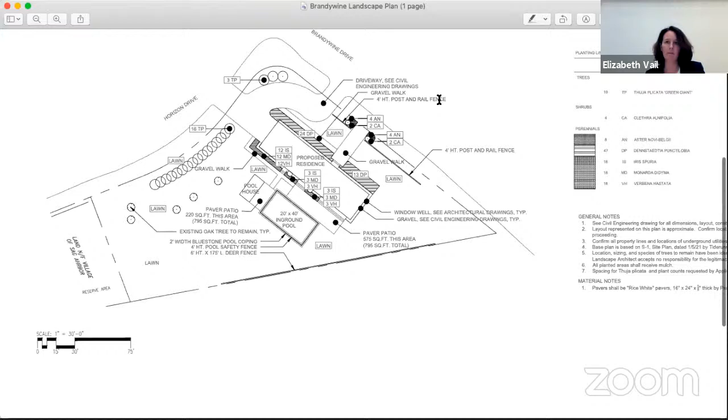Can we go back to the front elevation? Yes. Sorry, can I say one thing?

I'm not sure if we've said this or not, but we also need a plan for the pool house. We need to see it. Yes, it's on there, I can show it to you. There is a drawing of the pool house.

Can we start with the main house and get some macro comments from the board members, and then we can look at the rest? Okay, I can. We're going to need a lot of detail on all these plans. So let me just see here.

So this is the house. There is no eave. I can show you a picture of the house. It's been designed after, if you'd like to see what it looks like built, because it's been built in Bridgehampton on Mitchell's Lane. The only difference is that house is a different color and the materials are different, but the shape and design are the same, or very similar in terms of the roof line and the design of the elevations.

If you have a quick picture, that'd be great, but we're going to require the architectural details so we understand how this is working. It's very hard to understand, especially at the front door, how that's going to look. The front door, I also have a picture of the front door I'll be installing, and a photo of that. If you just bear with me one moment, I can show you.

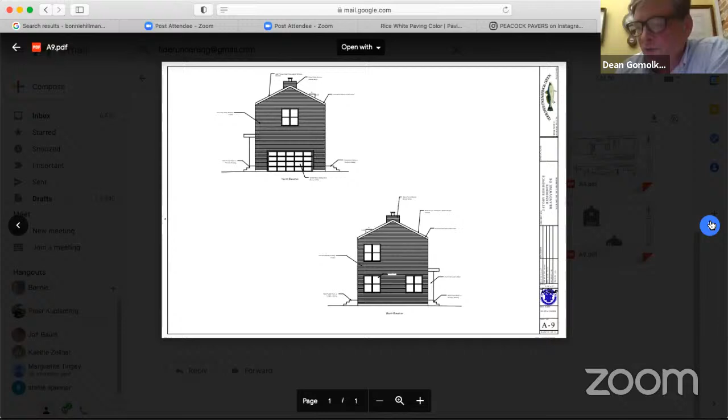Vail, do you have any quick comments about this facade? I think it would be helpful to get a bit more detail. Here is a 2 foot — this only comes out 2 feet because I'm limited by the building envelope and the setback at the front, so it's just going to be a flat awning. And then on the sides, but I have photos I can show you of what we had in mind for that, and it's going to be in a light color. This is a discussion, so I just want to see one photo and get a gut feeling from the board, and then if you could please supply us with the detail that's required.

Okay, Dean, sure, no problem. Are you going to make a motion, because Mrs. Hillman did put in a full application, to do a public hearing at the next available meeting? No, that's impossible. Oh, it is. Okay.

This is a discussion, why is it impossible? Because there's not enough detail. We're not shoehorning it. I can show you the details now, I do have photos of everything. Here's the trend — sorry, just bear with me.

I'd like to see one photo and then get some macro comments from the board, and then we'd like to have these details provided for the next meeting. Okay, I can show you the details that I have so far that I think will help.

I'd love to see the photo. I just want to see one photo with details, because they weren't in the file. We still have some applications to go through, so I'd like to get macro comments from the board before moving forward. No problem, I understand. Just trying to pull it up.

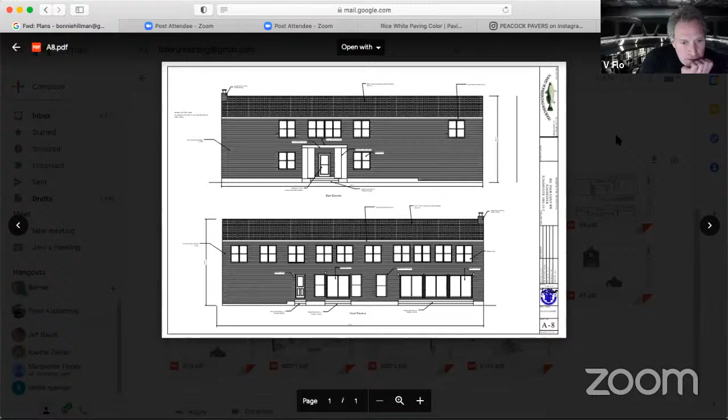Val Florio, you said you need more details. Bethany? I think the photograph really helps quite a bit because you get a perspective of the texture. Looking at black and white is a big difference from something more real world, so I think the image was a big help in describing the front door. As far as the back, there's lots of windows, but it does face a reserve. If this were more prominent, I might say that on the center, you have that triple door on the back of the house, and there's a lot of glass, a lot of fenestration, but it would look more organized if those windows stacked on top of the doors on the first floor.

Yeah, I agree with you, I would have liked that, but the engineer said it wasn't possible. He did his best. You can see here it's lined up, but because of the spacing, structurally it wasn't possible. Right, but you can't group those windows closer together, I guess. No, it was just a structural thing. Yeah, I mean, when we get on site, if it's possible, I do want those as lined up as much as possible.

I agree with that. I prefer it, but only if it structurally allows for it with the 2x6s. We're on paper now, discussing this aesthetically, so let's just stick with the aesthetics.

You could remove a window. Engineers can do all kinds of things, but for me, the back - I appreciate that you're looking onto the preserve, but I'm not understanding the aesthetics of the back of this structure, as well as the front. I think the details will help out tremendously.

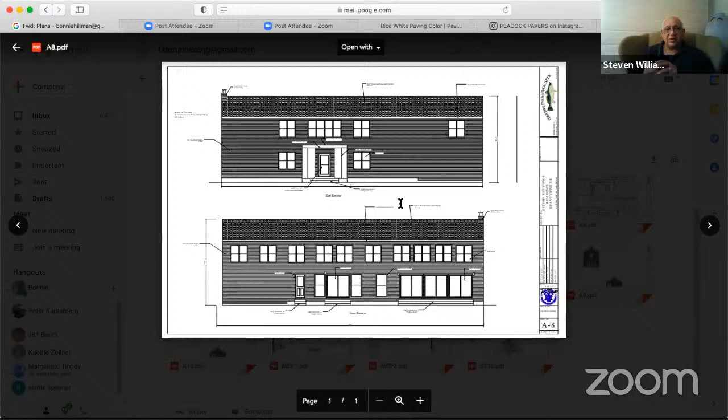So with that, we're going to move on. How would you like that presented? Can I do it as a bullet point presentation? This is an architectural review board, we need architectural drawings. You're on to something, you just need to pull it over the finish line.

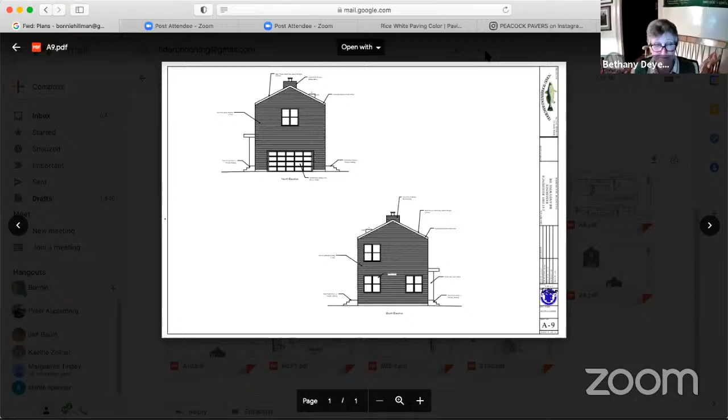Carrie, I sent you two packages. I don't know if you can pull them up or not. The first package, which I finished first, was for the pool house and the proposed pool. Then because there was a delay in the meetings, I was able to finish the drawings for the house. So I'd like to start by talking about the house.

The house was built, we think, in 1845 or 46. According to the Suffolk County Commissioner of Deeds, there was a bill of sale or title that passed in 1840.

There you go. This property... can you hear me? We can't hear you. Yeah, here is the house. You can't at all? Did you hear anything that I did? Yeah, yes, we did. Yes.

Yes, okay. And the front of the house looks like it's a very small house, but in actuality, this house goes very far back, 71 feet to be exact. And it's called a 1.5-story house, I think because the second floor ceiling is only 8 feet at its highest point, which was really too low to work with as far as the addition. More space was needed because the client's family is going to be expanding and they need a master suite.

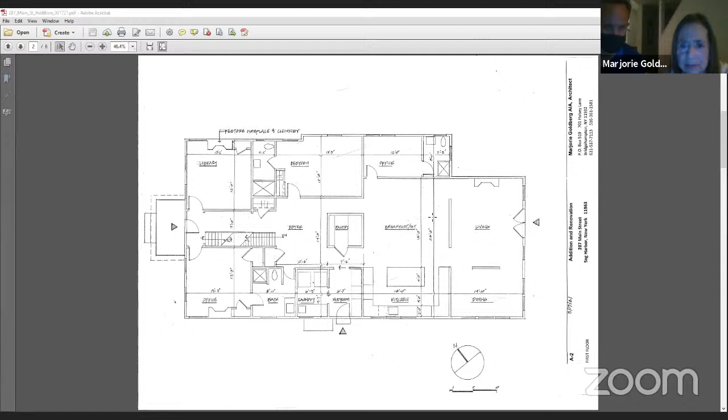Carrie, so we can all see your screen now, Carrie. Thank you. If you scroll down to the elevations, yeah, that's it. Oh, there you go. No, not that one. Well, the top one is the front from Main Street. But if we go to the next, A3, there's the chimney. There's the extra chimney. Yes. Go back one, please. Carrie, can you go back one? No, back to the... sorry, down one. Down one. Down. That's it. Stop. No, not that one. Down one. Thank you. That's it. There it you go.

Okay, rather than try to squeeze in more space with an 8-foot ceiling, and rather than go higher, which would be terrible, butted up against the existing house, I thought it would be better to have an addition pretty far away from the house, but over the back of the house. So that is what we did. And what you see in this gable, which is the same angle as the front gable, is the master suite. Because it's pushed back from the edge of the house, there was room there to put in a deck over the roof.

Just to jump in here, it's very hard for us to understand what's going on. If you have an existing elevation and then a dashed line or a dotted line, so we know what you're adding or propose to add, it would be super helpful.

Are we looking at what's there now or what? No, only the front elevation shows what is there now, with the addition of the proposed chimney. In this drawing on the south elevation, all that is there is the front in the dark outline, and then the first floor. Everything else would be proposed, including the second floor. So the actual house goes all the way back to the end here. That's right. And it is all very old, because I have maps that go back...

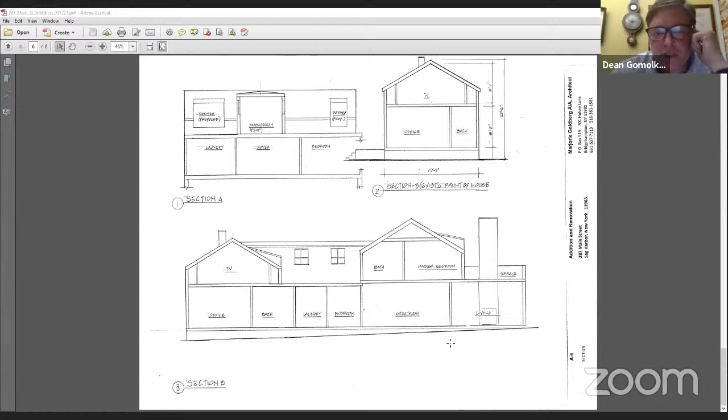You have a problem with the new proposed ridge line being higher than the original? Yes, that's step one. That's something that from the street we're really trying to maintain - what that streetscape looked like originally. So building up higher is definitely something we hardly ever go forward with. This is a wonderful example of our history here, and we really need to make a site visit and meet with you if possible.

Sure, to review this. Yep, that'd be a very helpful point of beginning for both of us.

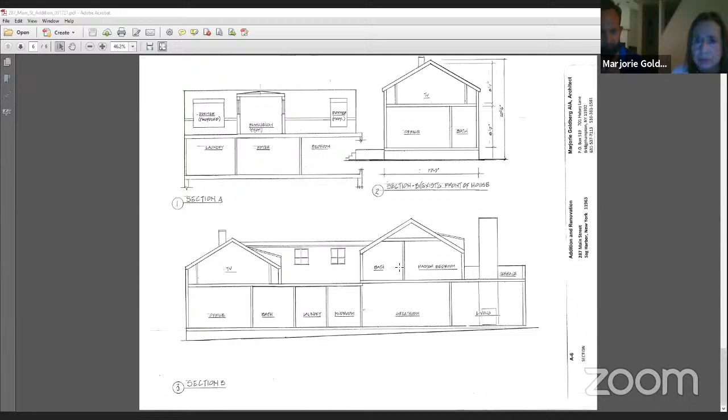All right, the second part of the submission was for the pool house and the pool. Carrie, do you have the survey with the plot on that? It's a separate document. Hold on, I'll look for it. There we go. The property goes way back, yes.

And in order to fit into the setbacks, we are putting in a very narrow, small pool, and we would propose a small 200 square foot pool house that would be harmonious with any proposed addition we could do. Now we are above the allowable lot coverage, but we're proposing to remove the patio, asphalt, and gravel you see, thereby coming back to a number that is below the existing. So I don't know if you would allow that or not - that's detailed on the survey numbers.

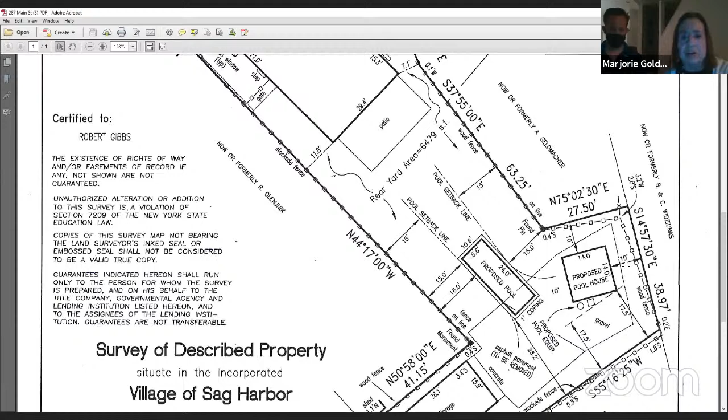If you scroll down on this survey, you have all the numbers pertinent to this. Scroll up, the other way. We have to maintain that lot percentage. Scroll up. Okay, thank you, keep going a little bit more. Yeah, there we go.

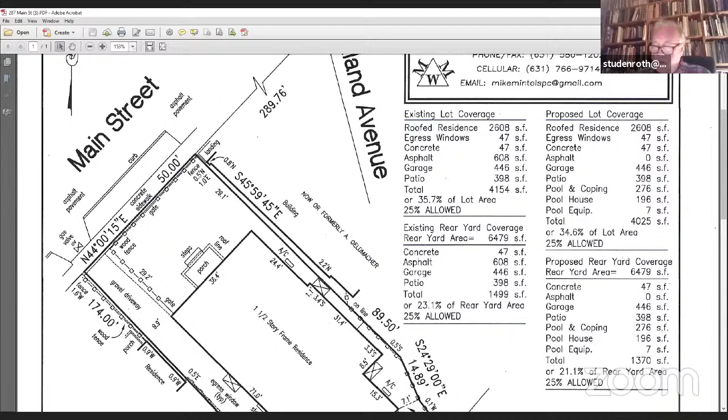Jared? We can't hear you. You have to unmute. Yes, can you hear me? Yes, we can. How are you? I'm doing just fine. I'm not 11 Henry Street. Oh, okay, sorry, I thought you were. 11 Henry? Michael Schmidt. I don't believe he's on. 81 Long Island Avenue. That Jared, that's Jared, that's me. Sorry. Great, not a problem. Okay, Jared, let's go. We have two Jareds, what more do you got?

Okay, my name is Jared London. I'm the architect for the client at 81 Long Island Avenue. May I share my screen? Please. Okay, bear with me just a moment.

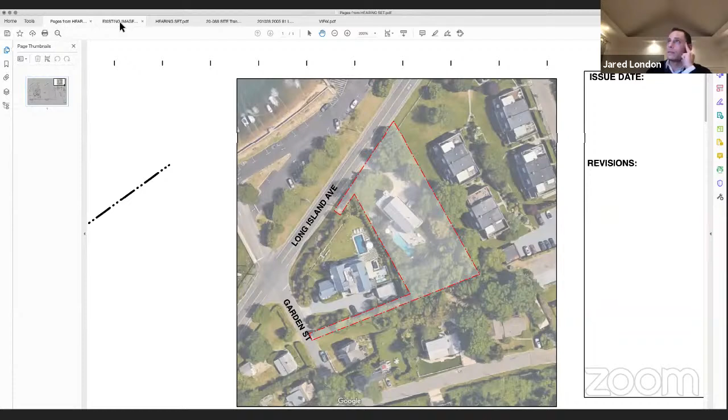The proposed property is located on Long Island Avenue. It's situated between 91 Long Island Avenue, the residence here, and the Bridge Street condos heading down into the village. The lot is 22,000 square feet. The existing house was built in 2002. It was just built. I'm amazed, so this is the existing house. Yeah, it looks like a ship. Right, that's correct.

The existing house is 3,400 square feet, 4 bedrooms, 3 bathrooms. It has a raised pool, deck, and garage, as you can see. Bear with me while I circulate through this.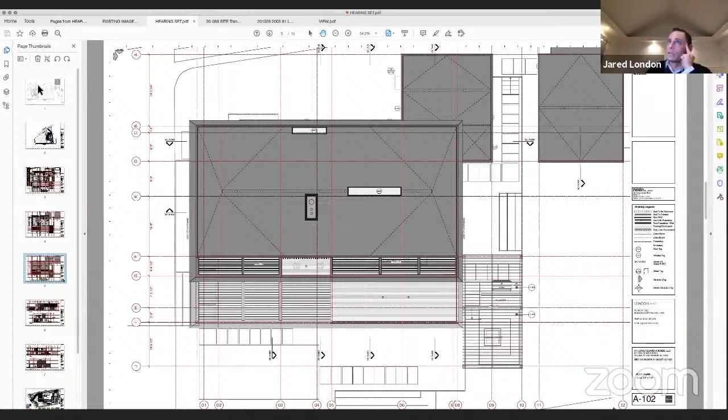What we're proposing is to build a new house, 3,370 square feet, so 30 square feet smaller. Again, 4 bedrooms, 1-car garage, patio, trellis. The new house will not have a swimming pool. We're proposing to bring the footprint of the house approximately 50 feet further back from the road, behind the AE6 line, situating it more adjacent to the neighbor's property.

What variances are you looking for here? I'm sorry? Will you be requiring a variance? We are not looking for any variance. Smaller than what's there? It's the smaller design than what's there. Yeah, and again, no pool. There's no pool. There's a large grove of bamboo on the east side of the property that we're going to be removing.

We're going to be replacing that with clusters of green giants that will create a better separation between the condos and the main residence. Some of that will actually come from the opposite property line, where there are some existing green giants, so we'll be moving those to the opposite side. There's a lot of dry underbrush along the street; we're going to clean all of that up and replace it with a combination of shad bush, flowering dogwoods, inkberries, and other native vegetation.

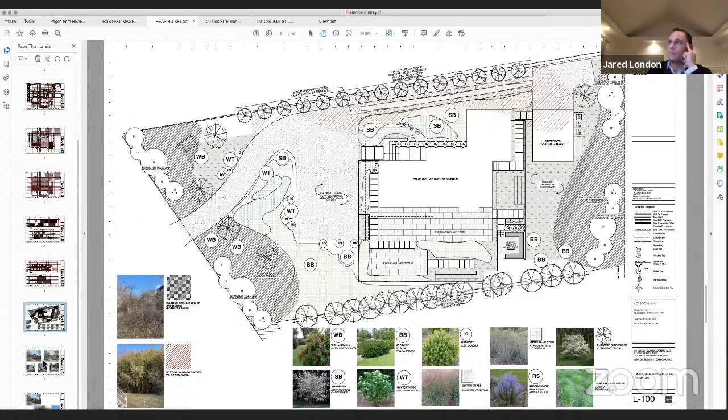The driveway pretty much stays in the exact same location. So this would be a view from the street of the house that we're proposing. It's a modern house, approximately 7 feet lower on the site than the existing house. So 50 feet back, 7 feet lower. Elevation of the finished floor is 9 feet, so we are more than conforming with BFE, even though we've brought the house back behind the Zone X line.

So just look at elevations here. Super clean, simple, modern. Siding is going to be vertical grain clear cedar with a weathering stain. Windows are going to be black anodized aluminum. Chimney would be stucco.

It's a very interesting design, I'll say, but I understand it's not historic, it's a brand new build. I think it'd be beneficial if we took a look at the site as well. Absolutely. You have a lot of second story terracing there, and it would be important for us to take a quick look and see how that impacts neighbors and streetscapes. So I should note that the terracing we're proposing is not only 50 feet further back than the existing house's terracing, but it's also 7 feet lower.

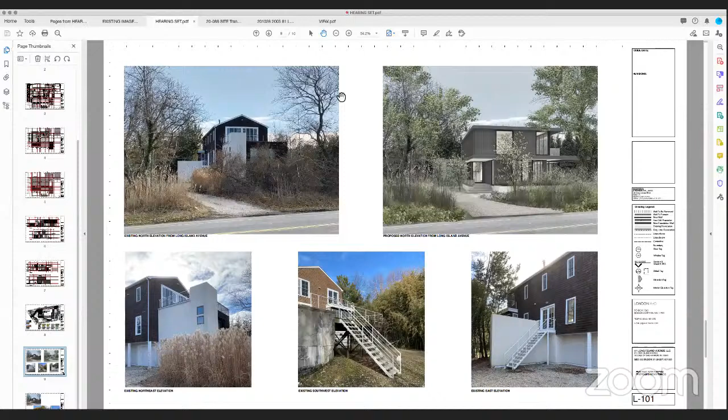I agree with that, Judith. First impression, I think it's very handsome. I like it a lot. I just really would like to see how it fits into the landscape.

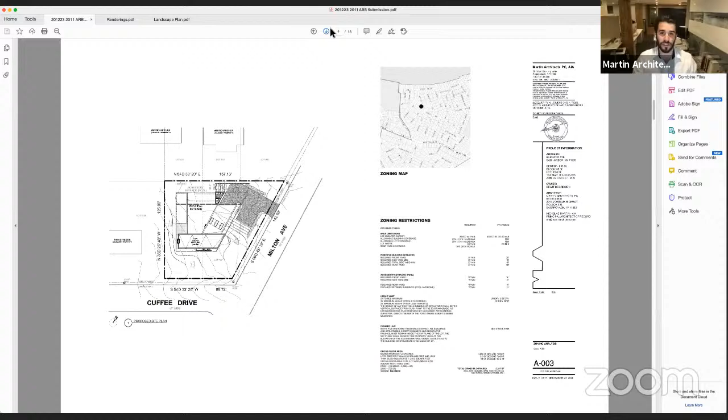And the entrance into the house, the property itself has some pretty drastic grade changes, as you guys can see by this site plan. If you'd like, I'll zoom in a little bit. So we have a drastic change in elevation between this corner here to the top, which is close to a 15-foot difference in height. So we're going to maximize that when we approach the property and use it as we design it.

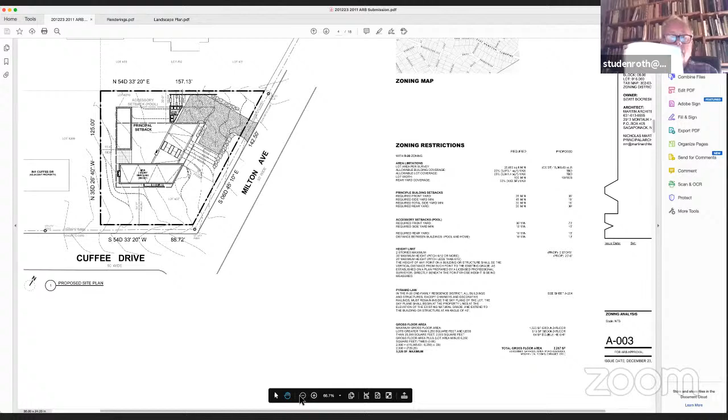So I'll move on to the plans now. This is just the general landscape plan idea that we have. We're going to keep as many trees on the property as possible. There are going to be 3 that are removed, 2 trees where the location of the pool is going to be, and another one in that location as well. All the other trees are existing to remain. We have some pretty large 36-inch oaks that we want to keep.

So we don't want to disturb much of that. Most of the primary vehicular access into the property is going to occur in Milton, and it actually goes down. So we don't want any headlights of cars to flash into neighbors. So we push all cars to the lower level.

Can we see elevations of this house, please? Absolutely, these are the floor plans. So this is the elevation along Milton.

So we play a lot with the idea of rain screening and tongue and groove wood. The palette of the house, as you'll see later on in renderings I have to show you guys, is going to be a mixture of wood, Hardie board, as well as the aluminum windows. So just two materials to try to keep it relatively simple.

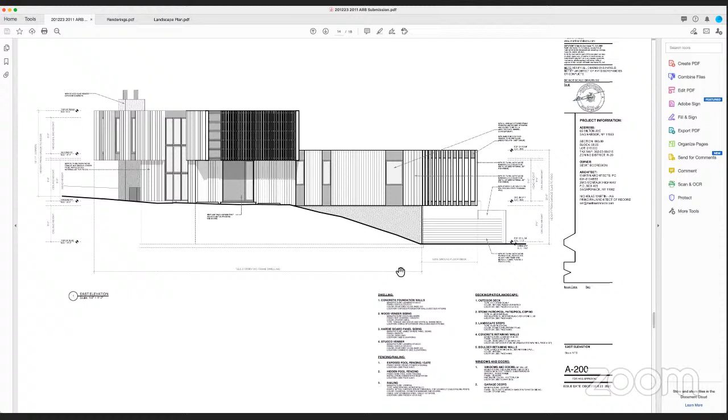So this is the elevation along Milton. Even though it is a 2-story house, we do break the massing of a 2-story building into 2 separate elements, just so there's some more breathability to the actual house itself and it doesn't become like almost like a linchpin in that corner. So the next elevation, this is along Cuffee. This is the only part of the house where it will actually read as a 2-story element, just along here, but that's also the same location where the stair is along the interior of it.

Can you give us the square footage of this home? Absolutely, the house is—let me just jump into the zoning. I believe we're a little under 3,000, so we don't need the public hearing. The GFA on it is 2,297 square feet. So it is a relatively small house.

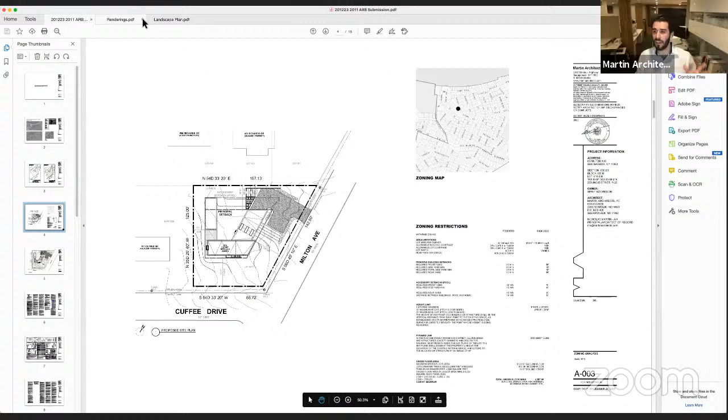Great, so I'm just going to jump into the renderings because I think they read better than the elevations, if that's okay. Yeah, just two quick questions.

Yeah, go ahead. The roof line elevation, on Cuffee and on Milton, what are those heights? So the height from finished grade is 20 feet up. On Cuffee? Yes, exactly. On Milton? Yeah, on Milton is actually less, because it's only the 1-story portion of it. That part of it is only from the street, because we actually go down underground. From the street, it will only be like 13 or 14 feet. It's not much, and it's further set back.

We're actually—I know that front yard setbacks would be 30 feet, but we push the house a little bit further in as well, just so we can get the cars to go in and down without making too much of a hassle out of it. So I'll show you the renderings because I think the renderings speak better than elevations.

So this is the view from Milton. This is where you drive down and go into the garage, and you could go up to the front of the house or up to the right-hand side. That's where the pool is and the main lounge area.

So it's a very existing, heavily wooded site, so we really like that. We wanted that to read in the house as well, and even in the design we use that as the inspiration for the palettes. We're using an Accoya pre-finished wood by Delta for the facades, and we're doing a mixture of tongue and groove rain screening.

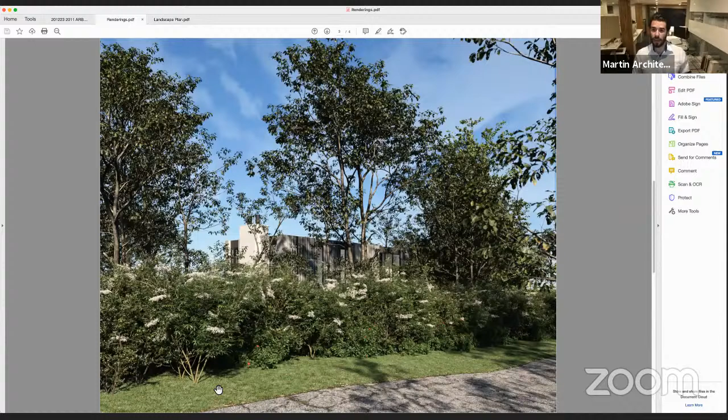We don't want to impose on anybody, so we just use some lower vegetation along there, but still have the house peek out a little bit. It creates a nice little juxtaposition.

And along the back of the house is where the main fenestration is in the house. Between the pool and the main kitchen area is all along here, and the living room's in here. So we maximize the use of this space, and the cantilever, like I said, breaks the monotony of a traditional two-story house.

There is only one deck, and it's actually inset in the house. It doesn't protrude, so it's this little corner right here, which aligns with the facade. Other than that, there are no second-story decks outside of that.

Where does that deck look onto? We did a few drone shots, and that's the only spot where in the winter you can see straight through to the beach through a few trees. It doesn't really look onto your neighbor, because it pivots a bit further than the neighbor. It actually looks diagonally toward Milton.

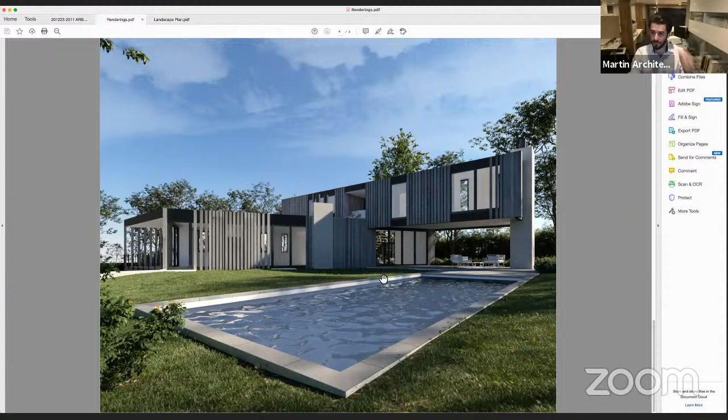Steve Williams, comments? The initial design is stunning, very attractive. The neighbors are also sort of modern design houses, at least the one directly across the street. It's very attractive. Thank you. Love that.

I believe this is like the money shot of the house. It's the first thing you see. It really does create this beautiful cantilever effect, as well as seclusion, and almost attracts you towards the house. So we are very excited with this house as well.

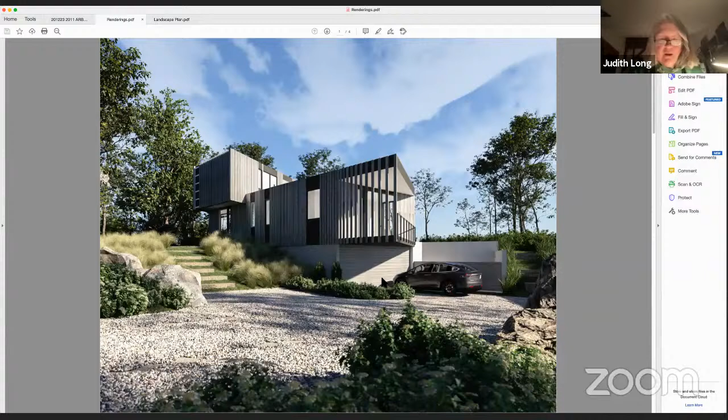Judith, initial comments? I think it's breathtaking. I love it, that means a lot, thank you so much. Bethany? I really like it too, it's amazing.

Val? Yeah, I agree, I love the natural wood. Not to speak to the other application, but because the textures are so earthy in terms of material choice, it integrates quite nicely into the landscape. It's not a loud house. It's beautiful, it looks great.

Thank you, I think it's a Bob Adams house, and I think it's a gorgeous house. I know the neighborhood there, and it'll sit in perfectly. For me, the house is a piece of art. It's great. My concerns would be the view corridors with this and the adjacent properties on the street, of course.

Grading is a big issue here. We'd really like to see how that's hammered out, how many of the existing trees you're retaining, and what existing trees you would be removing. That would be super important to have on a plan. Also how the landscaping works with your architecture and streetscape, and how it coordinates — that would be really, really important to me.